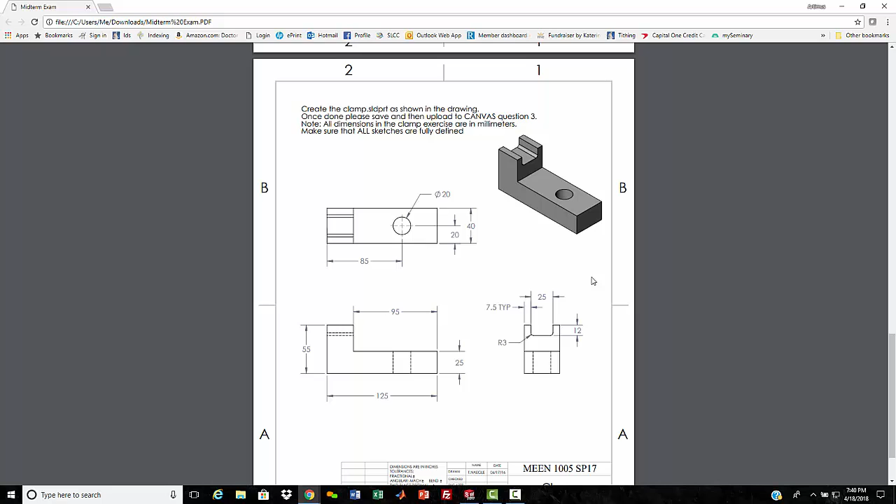What I'm going to do for you is model Exam 1 for the spring semester 2018. This exam had 3 parts to model. We begin with part number 1, a bottle; part number 2, a fastener; and part number 3, a clamp. So I will do each one the way that I would model them.

If you didn't do it the way I did it, that's fine. I know there are more ways than one to create these models in SolidWorks. With my 15 years of experience with SolidWorks, I've found this to be the easiest way to do things.

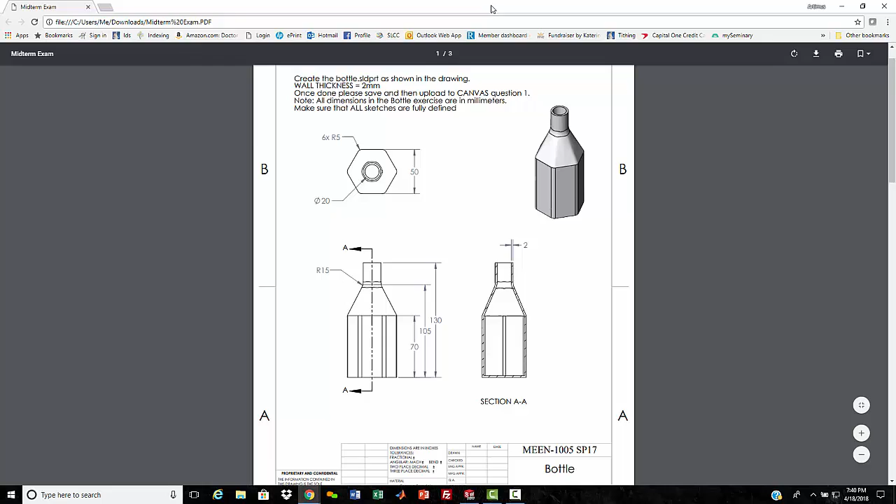So anyway, we got a bottle here. The sketch will be off the screen so it's not interfering with SolidWorks as I'm modeling, just so you can see it. We have a 6-sided bottle that is 50 millimeters across the flats, has a 20 millimeter OD on the neck, a 2 millimeter thickness of glass, and various heights with a radius here and a 5 mil radius on each of the corners past the hex.

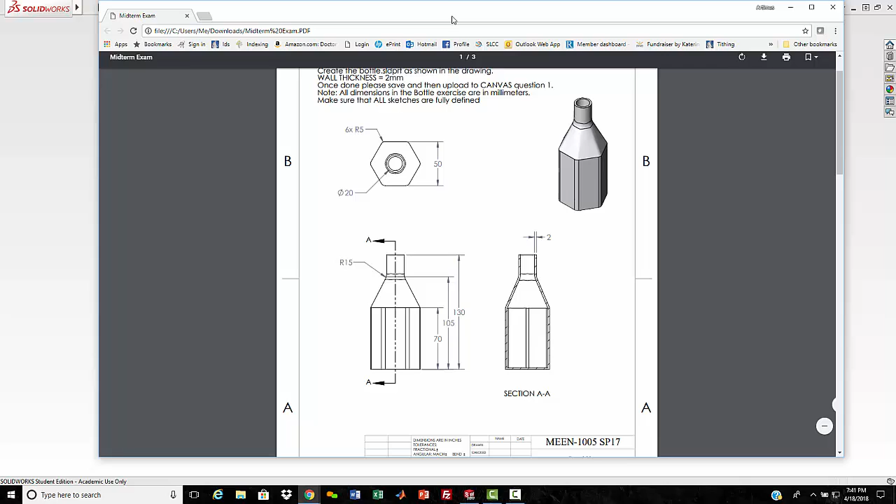So how would I do this? This is how I would do this. I would start by making a part, and I am using the student version of SolidWorks 2017-2018 because that's what I have on my laptop at home.

So first thing I'm going to do is build all my reference planes. I'm going to put the top as the bottom of my bottle, and then I need a plane that is - oh, we probably ought to change over to millimeters, make it a lot easier for us. But for right now, we can just specify that this one is 70 millimeters up and accept that, and then we'll come down and change everything to millimeters, grams, and seconds.

Then we don't have to convert from inch to millimeters. So we got our first one. Then our second reference plane is at 105 millimeters.

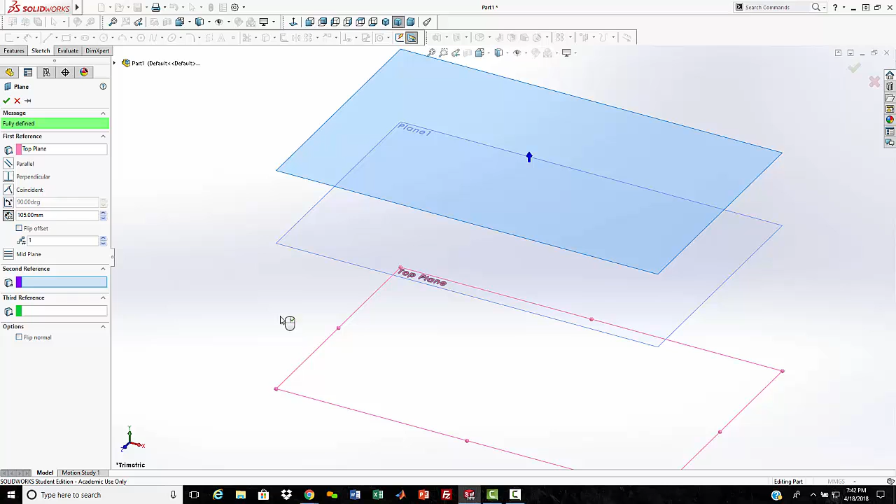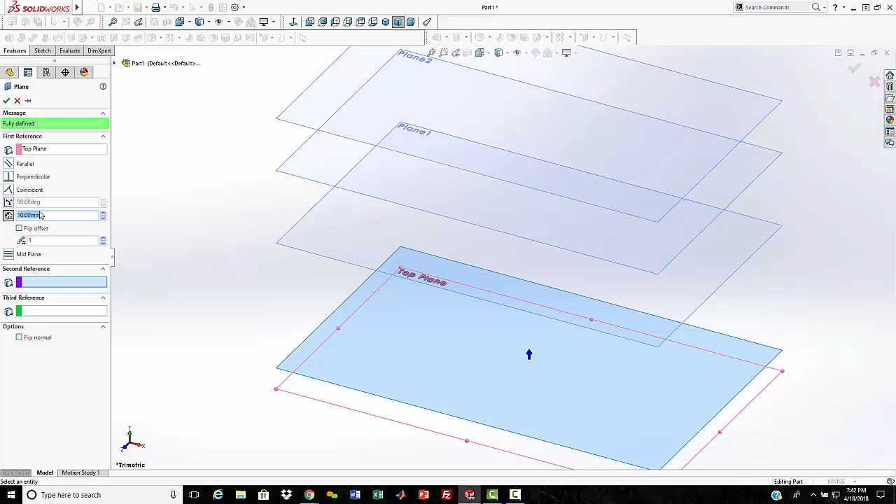And then the last one - what I'm doing here is selecting the top plane, control button, left mouse, and dragging up, in case you are unaware of how I did that. Another method would be to select the plane you want, come up here to feature, go to this, go to plane, and tell it the offset you want. I'm lazy, I find it a lot easier to just grab the left mouse and drag.

And then you can specify if they're parallel planes, if you're doing one that's at an angle to the plane or at a certain angle - you can make a plane in any orientation in space that you want. I'm going to turn this one on just to drive me nuts, but we're going to do it anyway.

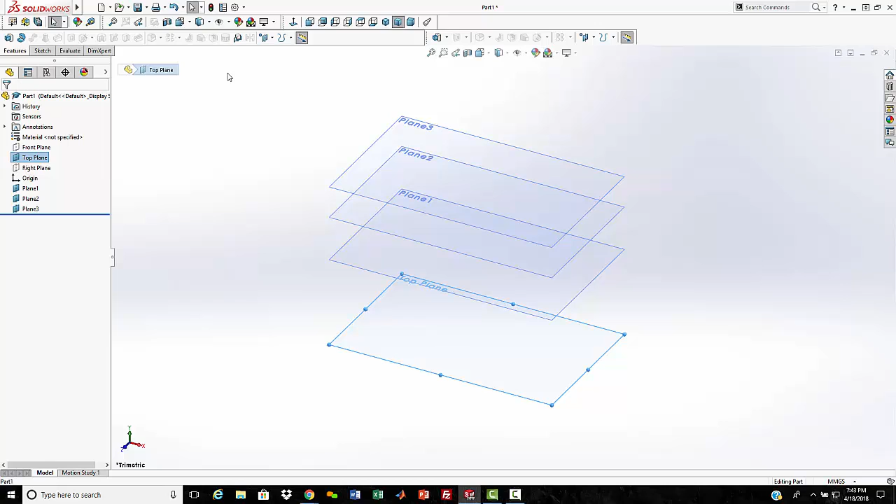So for the base up to the first plane, we have the hexagon shape. So we're going to do a sketch, and I'm going to pick my polygons here, and we are at 6 sides. If I click in the center, come down here, it doesn't matter where we put it. However, I do like to have all my sketches fully defined, and right now rotation is allowed, so we're going to grab that and make him horizontal so we can no longer rotate.

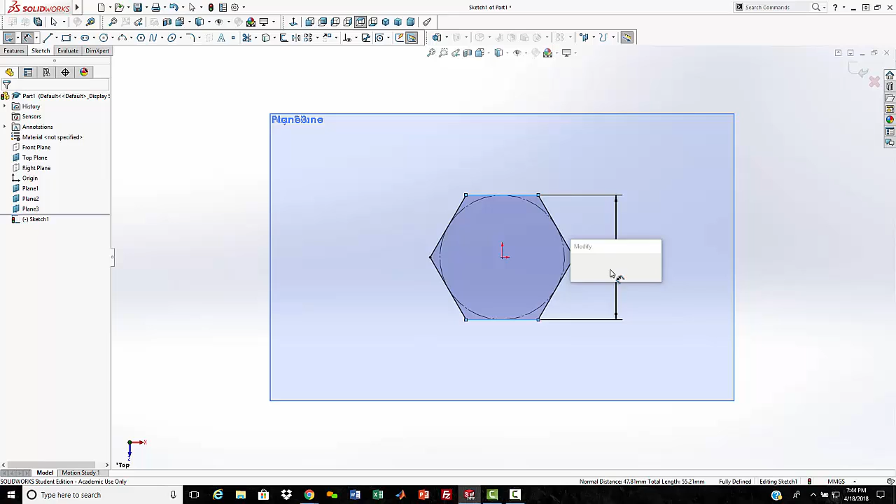Now we just got ins and outs, and then we will select a dimension, come over here, and that is 50 millimeters, and call it good.

Now this guy here is pretty much straight up, so we don't need to do a loft on him. So we're going to come over here to our features, and we're going to take him up 70 millimeters. Yeah, doing that we probably wouldn't have needed this plane here, but we got it anyway.

You know what, we're going to delete this guy, I don't want him anymore. See, I'm deleting that because if I put the sketch on the surface rather than the plane, if I change this dimension, it will change with it.

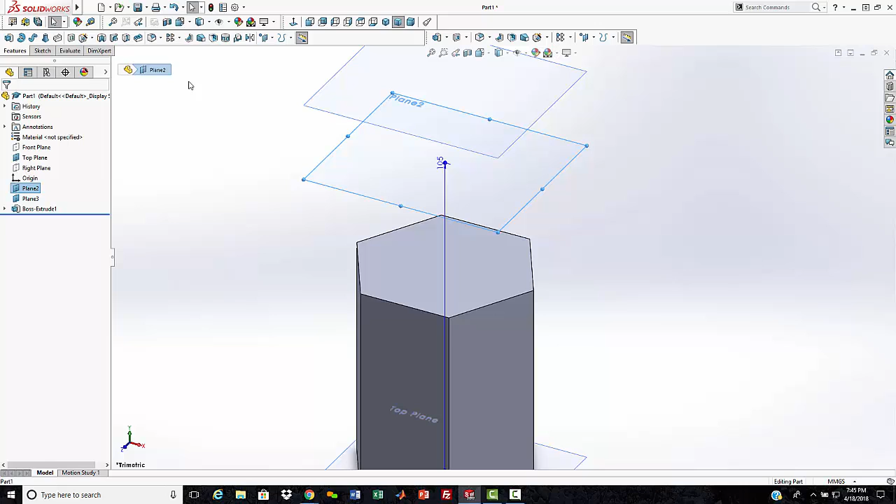Okay, so from there up we go from a six-sided surface to a round surface. So we're going to pick this guy here and do a sketch, and we want a circle right here in the middle, and our circle is 20 millimeters.

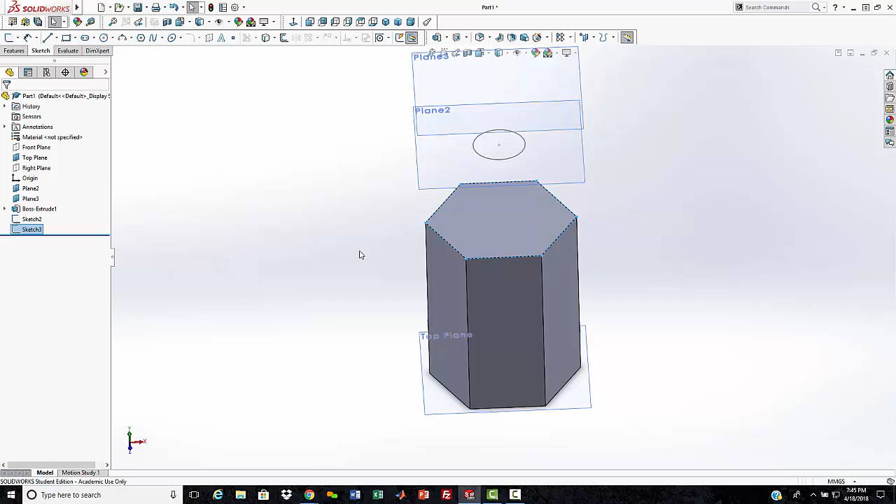We also want a sketch here, so we're just going to grab that surface, do a sketch, and I'm just going to convert the entities, which grabs all of the exterior edges of that surface and turns them into a sketch. Then we will take our front plane and do a sketch there.

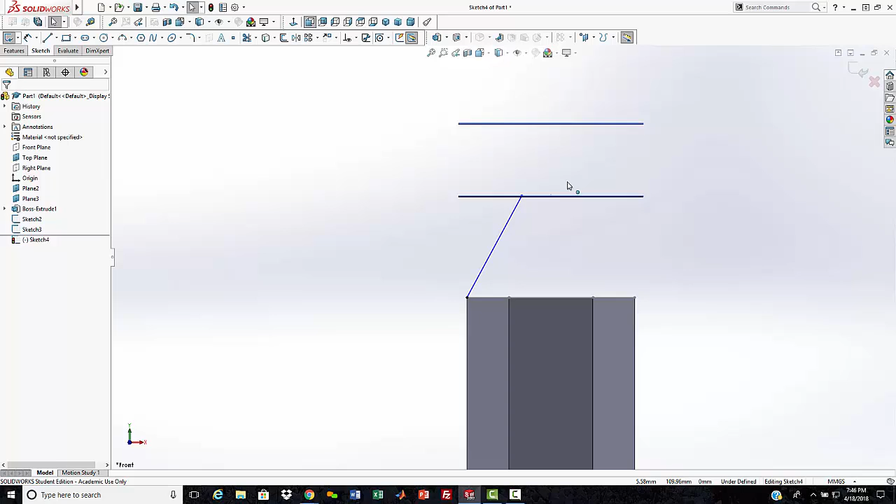This will be our guide sketch, and I'm not sure exactly where that goes, but we'll just put it there for now. He needs to be black too. Okay, so we can see that this guy's black, which means he snapped right to that corner. This guy up here didn't - he's red or blue, so he can still move.

So if we grab that guy and this guy right here and tell them to pierce, that line's black now, which means if you make changes to this, it will also change that line. That's why I like having all of my sketches fully defined.

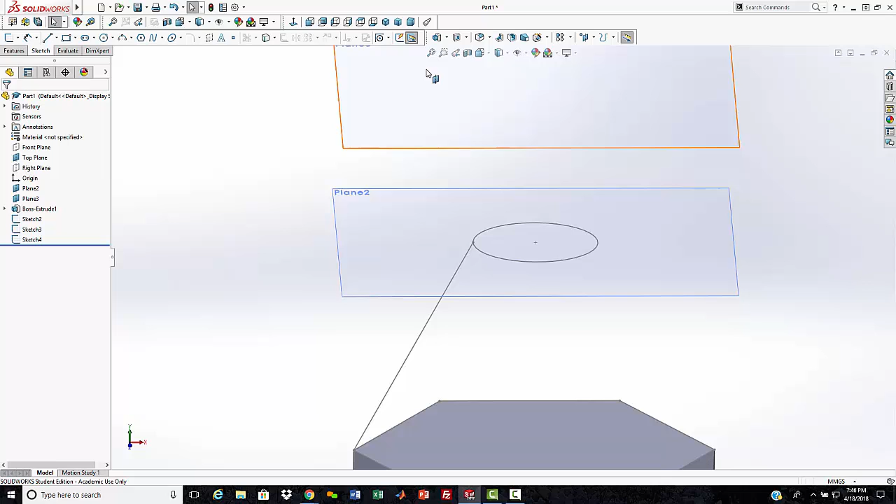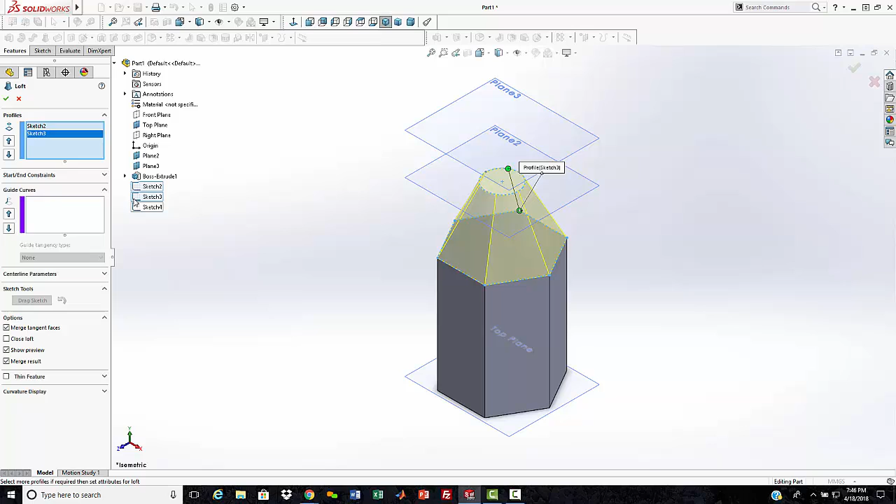So now we can come to the loft command. Loft, and our sketches - we're going from, you can either select the sketches here in your field, or you can come over here and select them too, whichever is easier for you. And then our guide will be sketch 4. It probably doesn't really need it because it's straightforward.

Oh, wait a minute, we left something out, and see here, this is what should be good - we forgot the radiuses on the corners.

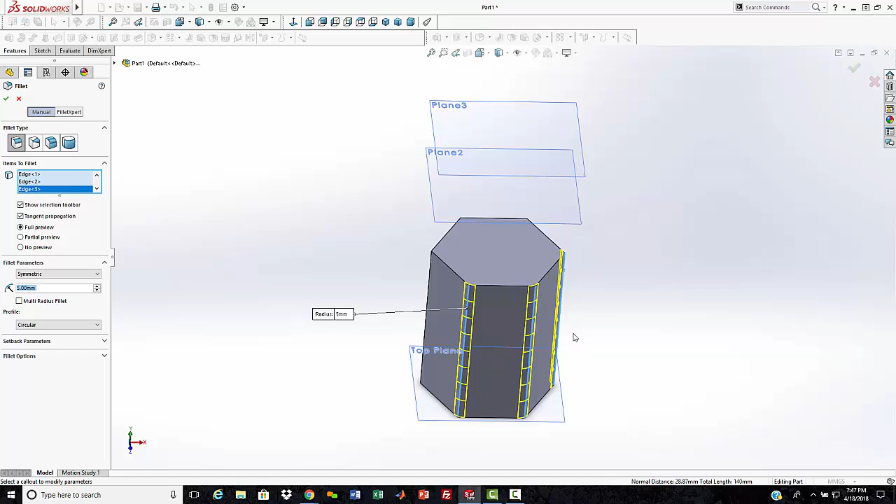Now you can do those radiuses two ways. You can do a separate feature of radiuses - we come down here and put fillets, do 5 millimeters, and select all these surfaces. Not that surface, this surface, this surface, and this surface. Okay, and that gives us our 5 millimeters.

Or if you want to minimize the amount of stuff you have over here, we can go back to our sketch and pick a radius of 5 millimeters and pick on each of the dots here. And this is going to make it scream when we're done because there's no surface for that fillet we just put in, to radius to.

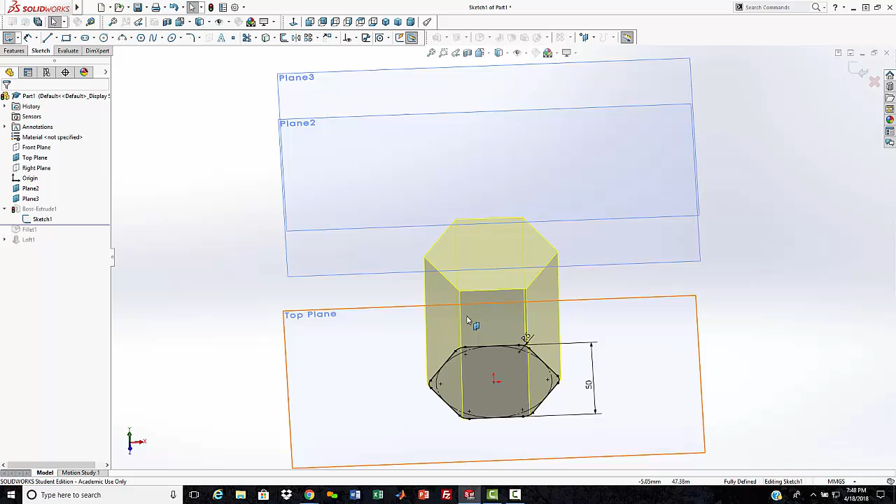We're just going to ignore that, and it's screaming because of this fillet right here. So we're going to get rid of that, close, and see, we got a problem now with our sketch here because we took away the corner that it snapped to.

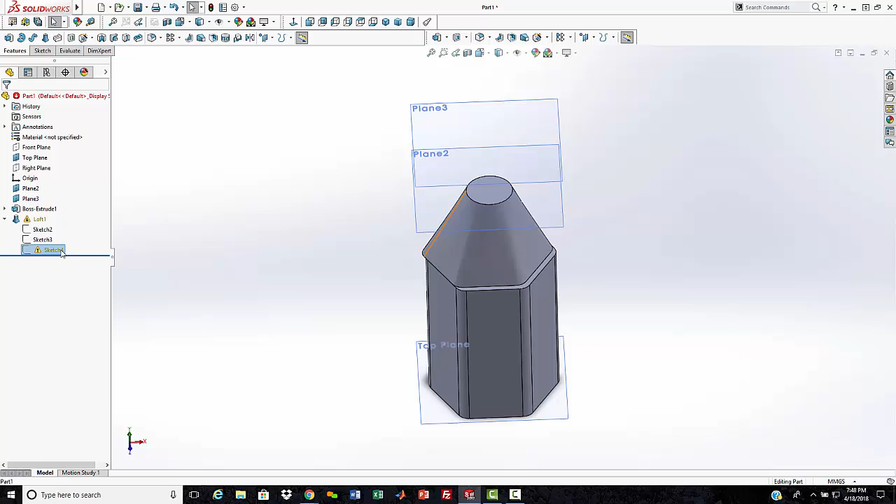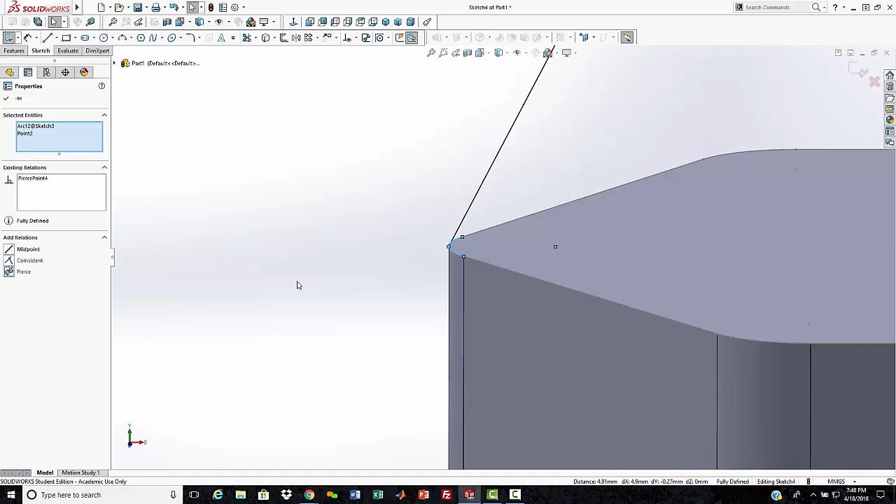So we will go on here, right mouse click, go up to edit sketch, and we will grab this guy right here and click on that mate and delete it, and then take and do like we did above, grab that surface, that point, and tell them to pierce, and then everybody is now happy. Happy, happy, happy.

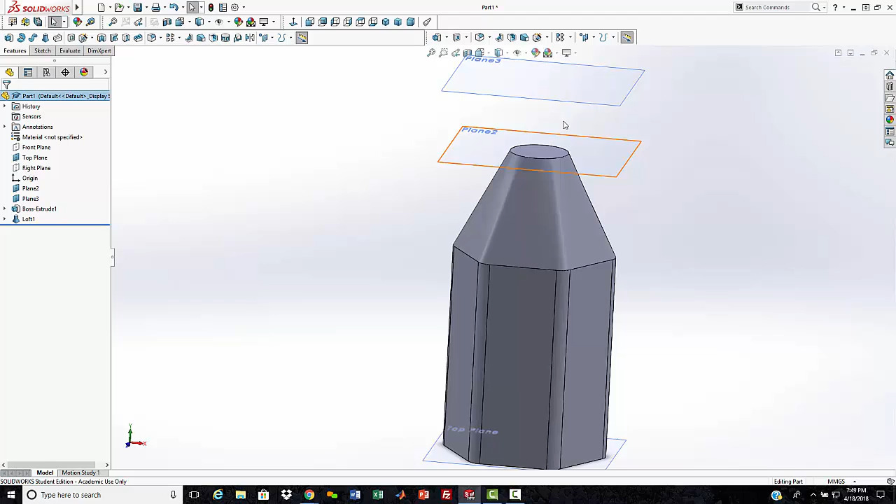Okay, so now we've got this guy here. We want to add the neck into it next. We can do that a few ways - let's do it this way. Let's grab this sketch plane, and we want to do an extrusion, and we're going to do a circle.

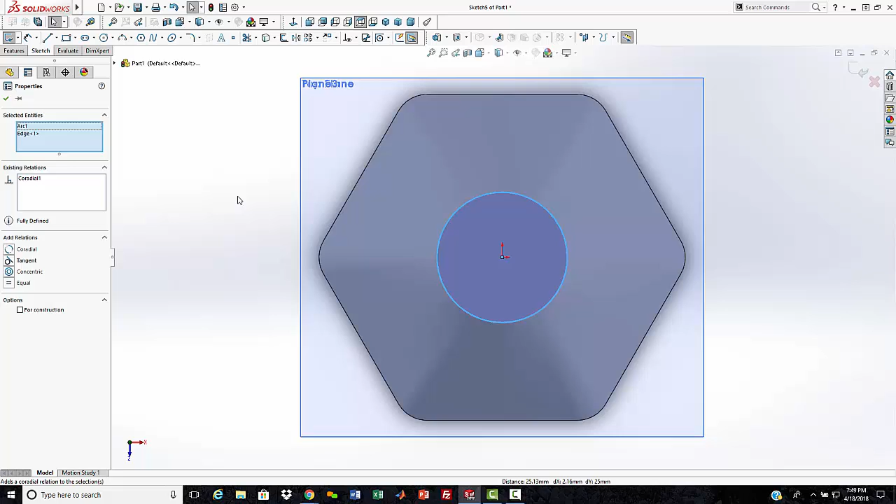Now there's a couple of ways to do this. If you want to tie that to your existing circle, you can grab that guy and this guy right here and make them co-radial. That way if you change the lower one, the upper one will change with it. Or you can dimension it and make the dimensions equal through some...

Oh, what is that? Equations - you can add an equation to where those will be the same. We'll just make those two collinear, or co-radial, and if you clicked on it, you'll look down here and see that it is a diameter of 20 millimeters, so it is the proper size.

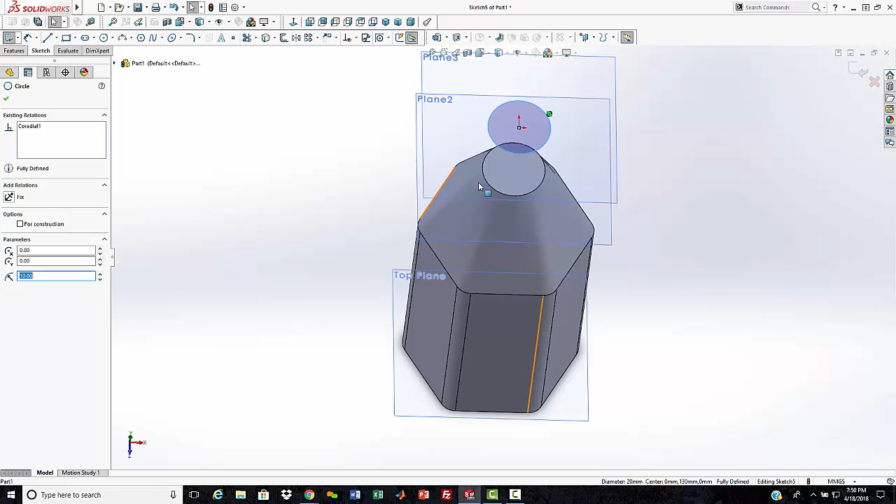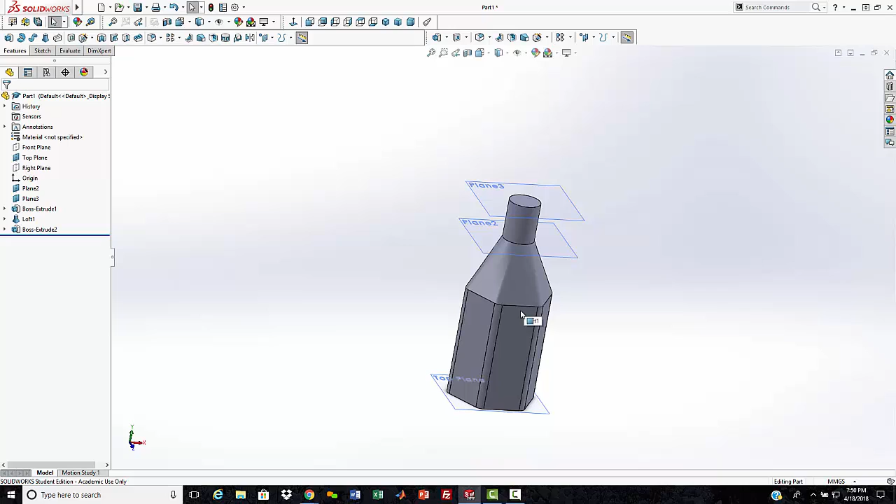And we're going to exit the sketch, and we're going to extrude up to a surface, up to this one right here, which is that surface down there, and call that good. And now if we make any changes, everything will change and everybody will be happy.

Okay, so now we need to add a 15 millimeter radius right here, so we'll click on that surface, go to fillet, do 15 millimeters, and call it good. And so there's the outside of our bottle.

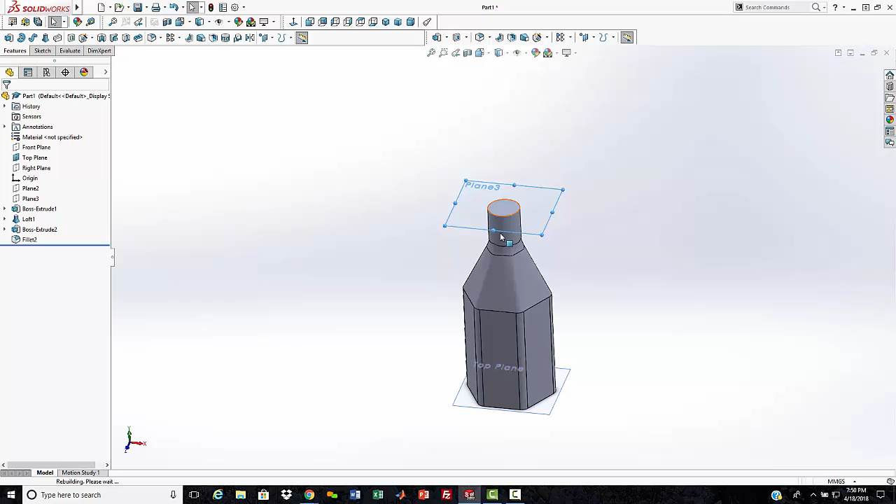I don't like these things - that's hard to see apart when they're hidden behind a whole bunch of planes, so I always hide them.

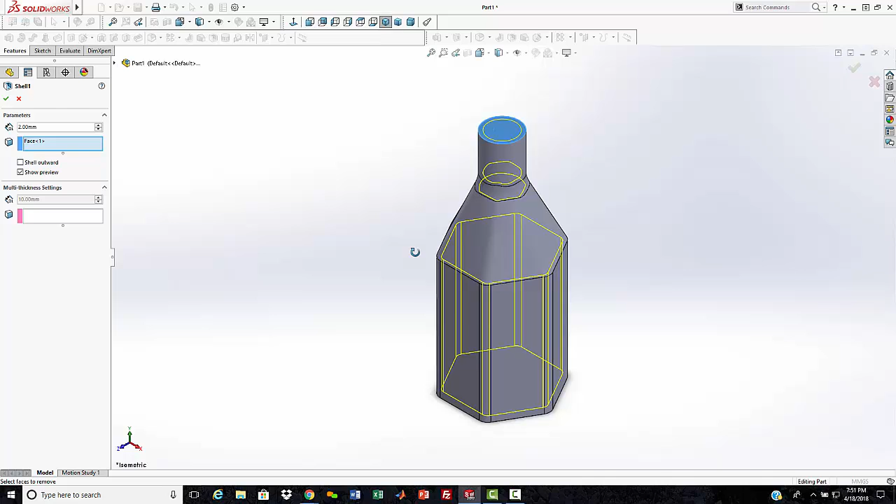Now the last thing we want to do is select on this surface here, go to shell, and we want to have a 2 millimeter wall. If you want to show the preview, you select it and you'll see that shells out the whole bottle. And if you want to make sure it goes all the way down, you can see right there that you've selected the bottom of it.

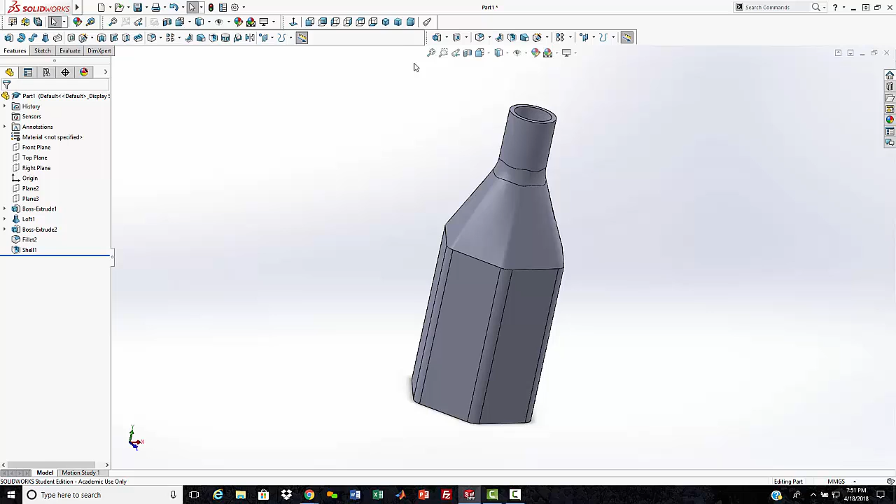So that is how I did the bottle. If you have any questions on these, by all means, let me know.

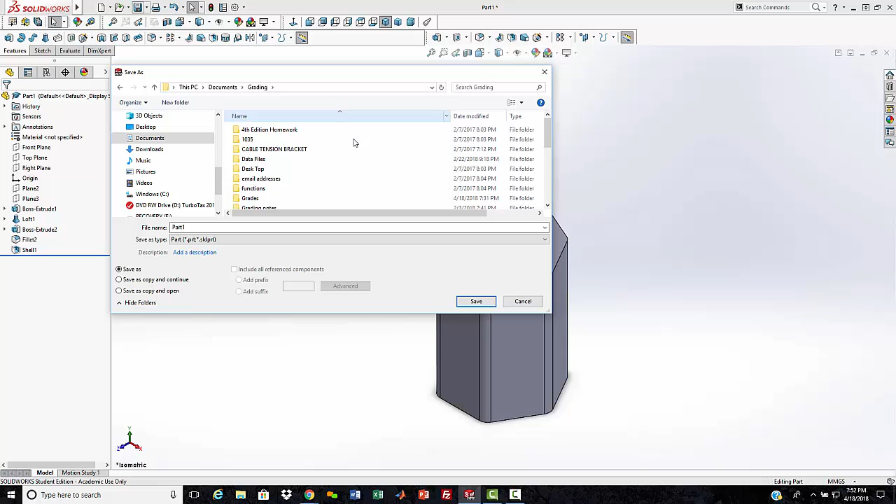We'll do a save here, not create new. I'm going to save that to my SolidWorks file. Somewhere I have a SolidWorks file... I don't have one. Oh well, let's create one. Oh, don't do that. Now where'd my SolidWorks file go? Refresh, go back into... there you are. Hey, I did have a SolidWorks file. There we go, cool, I thought I had one.

And this would be a bottle. I'm just going to put spring 2018 on there so I know when it was created. So there's the bottle. Okay, so next up in the exam was a fastener.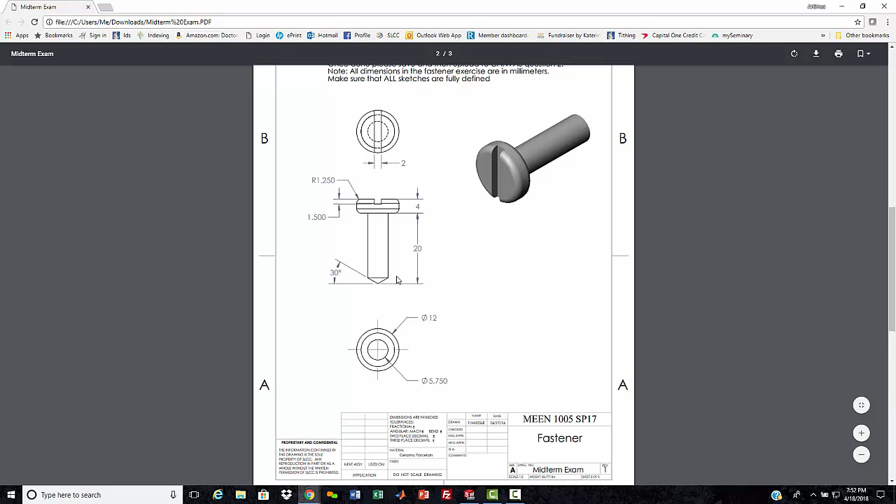This is a real simple design. We should be able to do that in two features. We'll do a revolve and then we'll do a cut for the slot.

So we're going to do a part, this time on the front. We're going to tell it what we're going to do first. Okay, so we're doing a revolve. We need to do our center line, so we're going to pull the center line off of here, and hitting the S key brings up this menu.

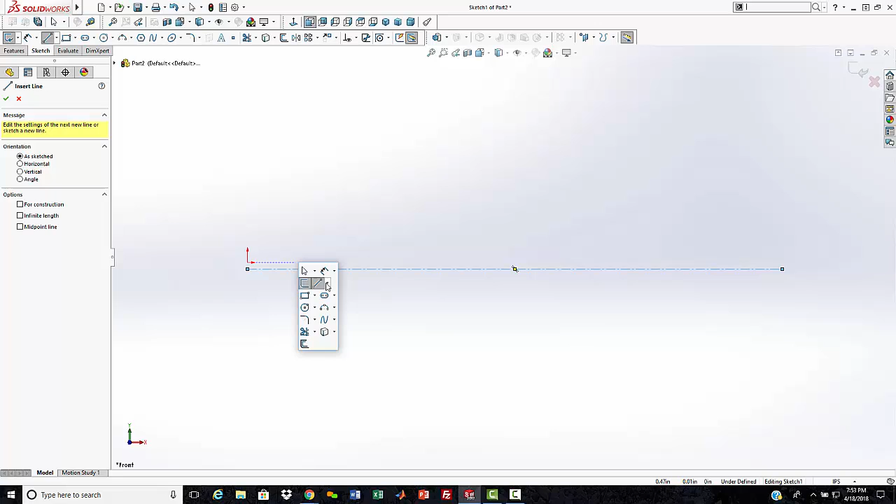We're going to draw solid lines now, and I'm just going to sketch out the fastener. You got to do half of it. Okay, and then we'll come in and dimension.

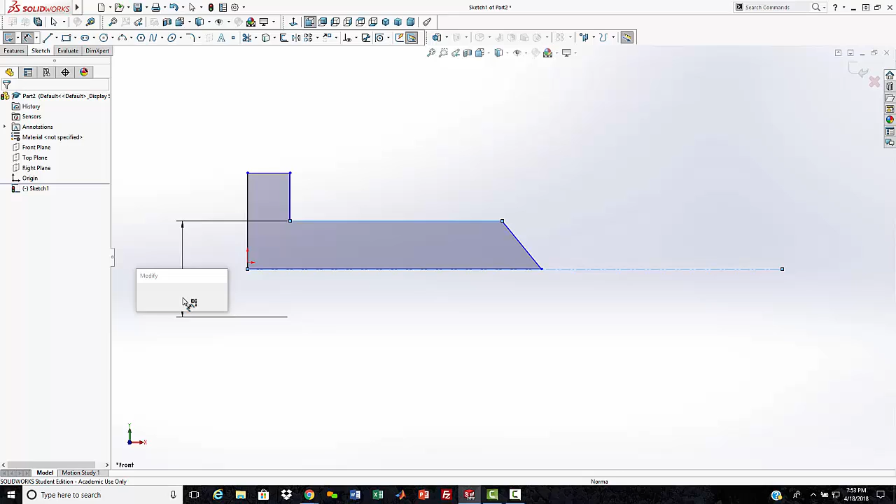If we click on the center line, we can then dimension all of our radii. This had a diameter of 5.75 millimeters. This had a dimension of 12 millimeters. This had a dimension of 4 millimeters. Our overall length was 20 millimeters.

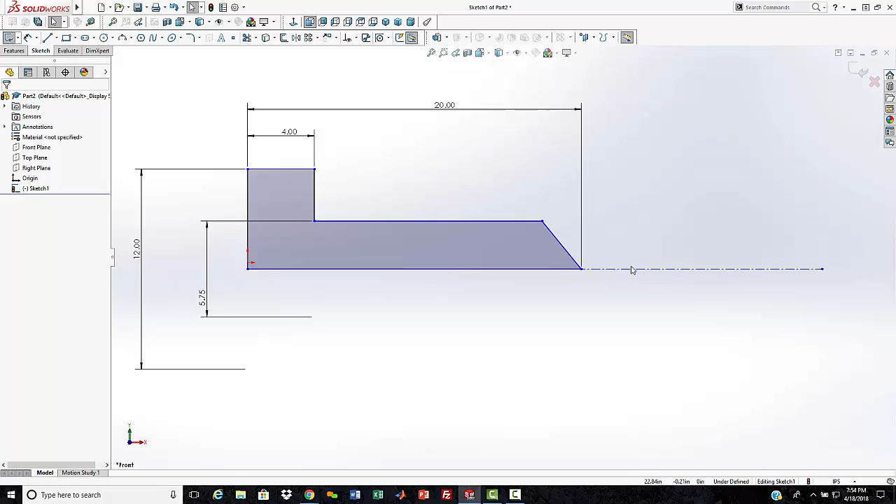Why aren't my... oh, because something here's not... oh, that didn't attach to the origin. There we go. We'll take those two and make them coincident, so all my lines should be turning black.

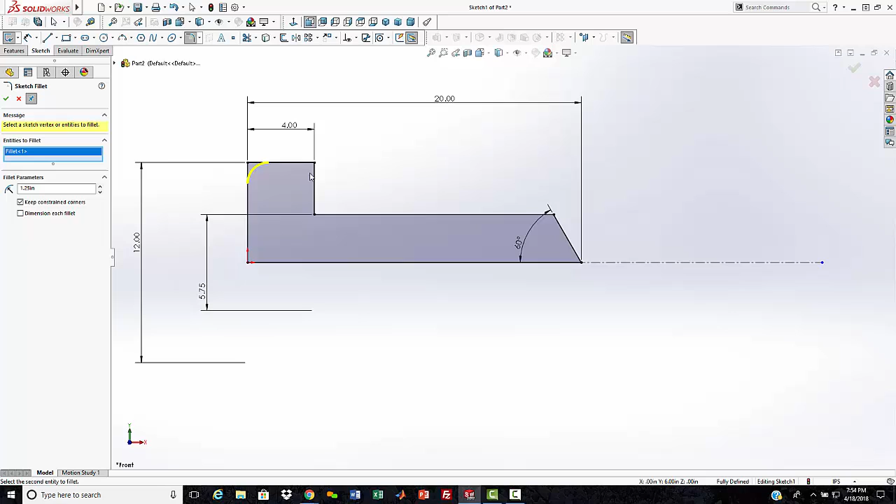And then we got to do a 30-degree angle on the tip. So from there to there, if we have 30 left over, that means this is 60. Okay, and we have radiuses on the head, so let's do those in here of 1.250 on a radius here and a radius there, and click OK.

We're done. Oh wait a minute, you didn't finish the radius, so let's go back to edit, and I should still have the right one. Hit that, and then say yes, and then close that.

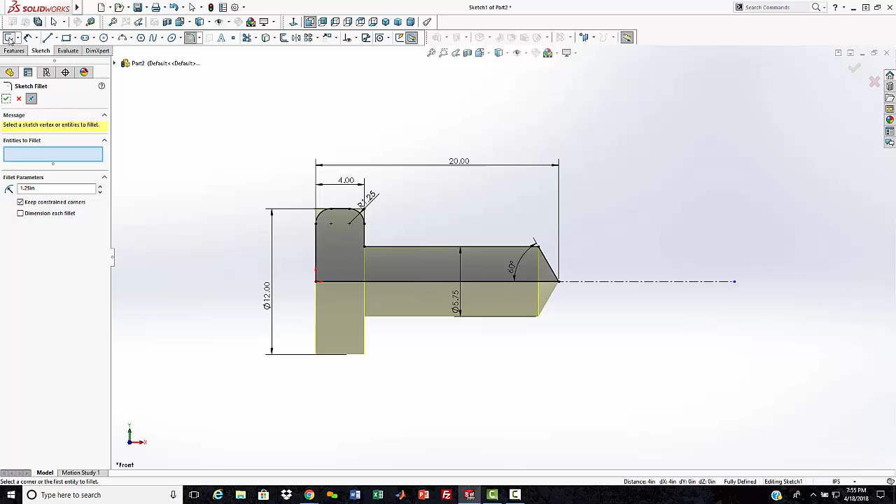Okay, so there's the body. And if we click on this, this should be 5.75. Click on this one, should be 12.

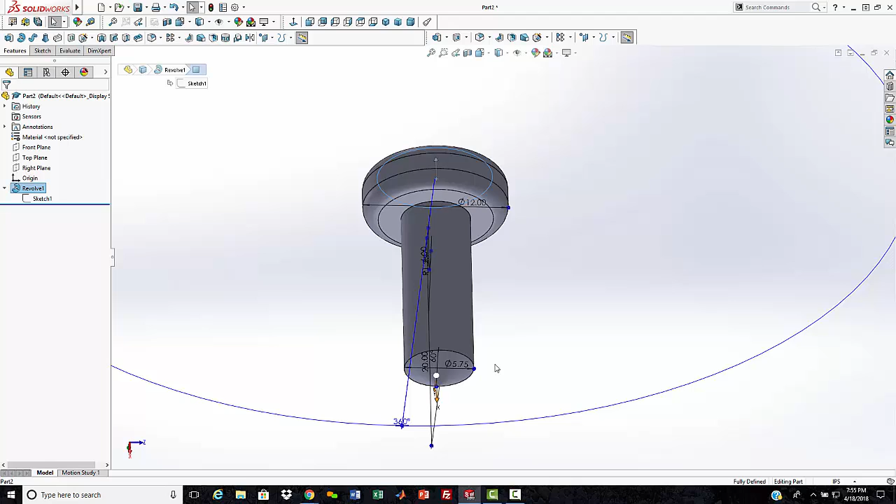If we click that surface and control select that point, okay, it's not going to give it to us. So we'll come up here and go get our toolbox, put it up here and measure, and we'll see that the normal distance is 20 inches.

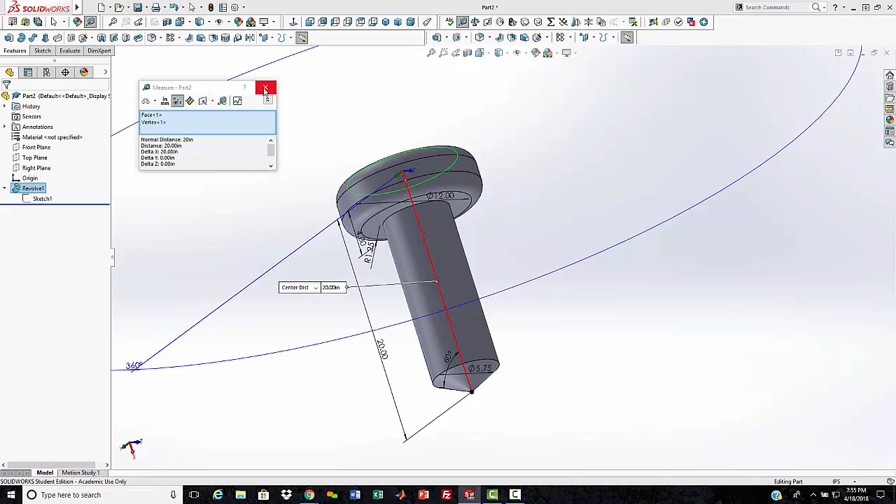Are you really going to post that on Facebook that you're so stupid you did it in the wrong units?

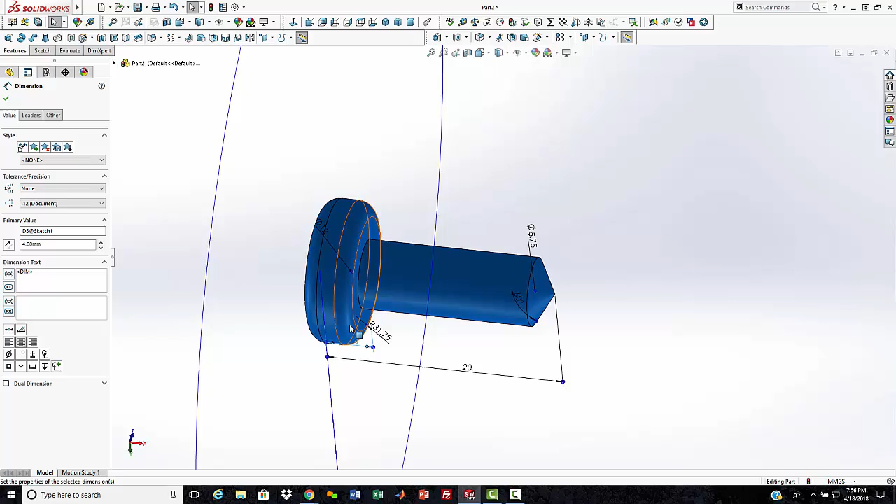Yes, I am. So this here was supposed to be 5.75 millimeters. This one was supposed to be 12. This one was supposed to be 20 - I didn't want a minus 20, I want 20. And this one was supposed to be 4. And the radiuses were supposed to be 1.25.

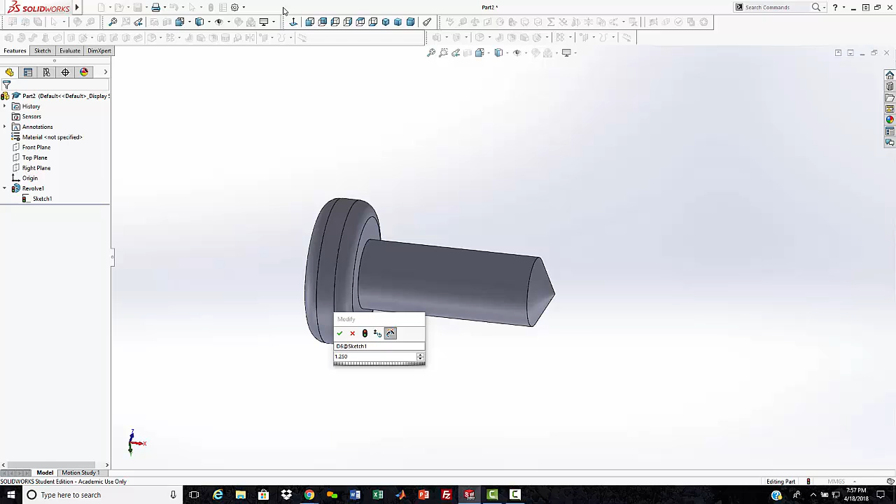And now if we redo everything... where'd my redo button go? Somebody stole my redo button. How can I not have a redo button? Oh, it's right there, it's not letting me do it. Oh, because it thinks I'm still changing a dimension. There we go. And now everything's a lot smaller, but it's still the same.

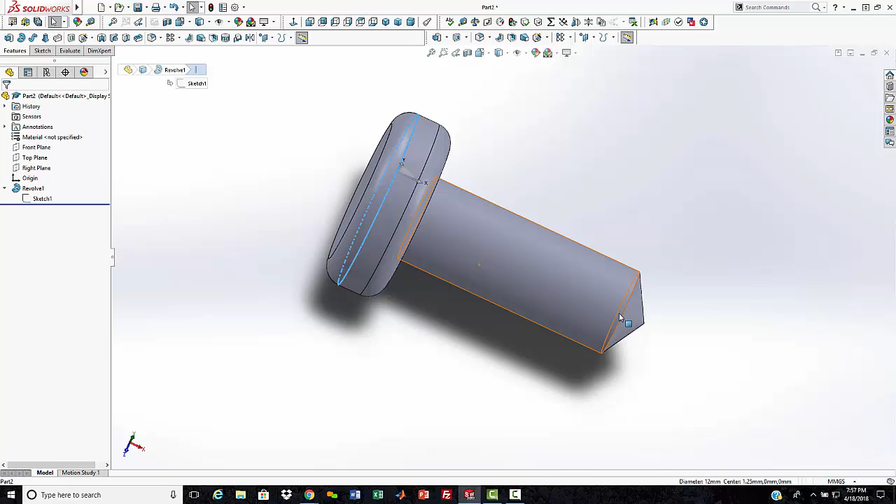That's 12 millimeters, and again, let's pull up our measure tape and measure from there to that tip, and we're at 20 millimeters, and from there to there is 4 millimeters, and they're parallel.

Okay, so the last thing we need to do to this guy is put the slot in. So we'll grab the front plane, come to our features, and do a cut, not a revolve cut, we just want to do an extruded cut.

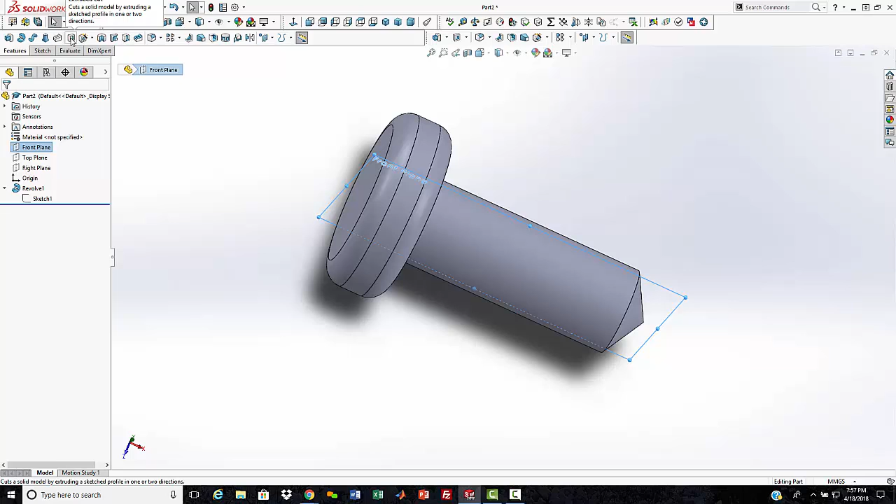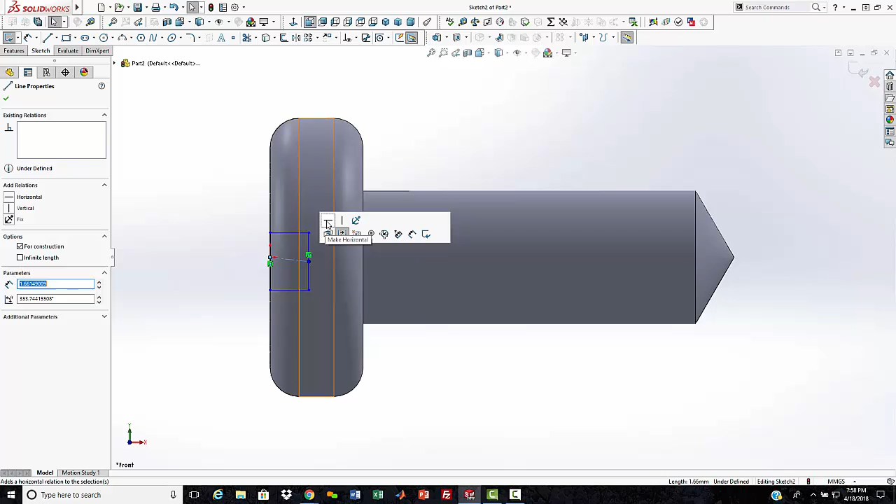And we'll put a square there, and then you can dimension that so that it is centered in there, but I like to take a construction line from the origin to the center of that one and then make this guy horizontal, and now I know it's symmetric, so no matter where I move it, it'll always be symmetric.

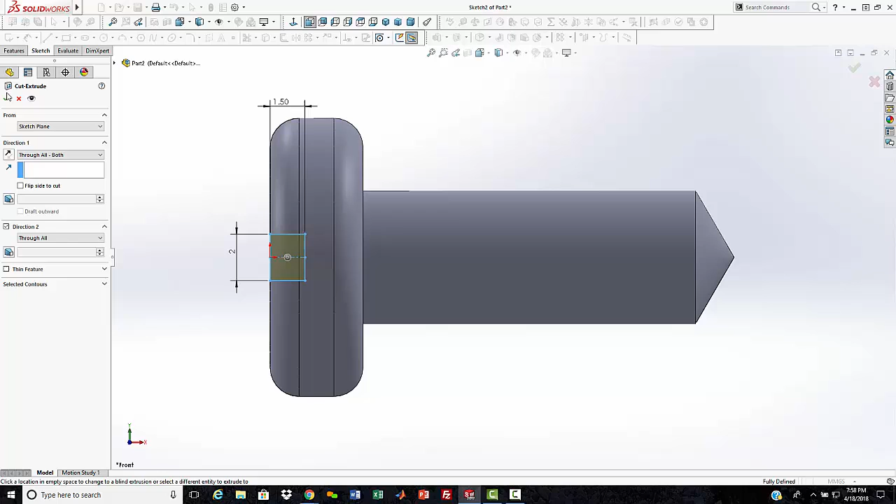So it is dimensioned 1.5 millimeters, and it is 2 millimeters wide, and we're done. We're going to extrude cut both through all, and there's our fastener.

Pretty simple little part, especially if you remember to put it in the right units. We'll try and do that one on the last one, do it right.

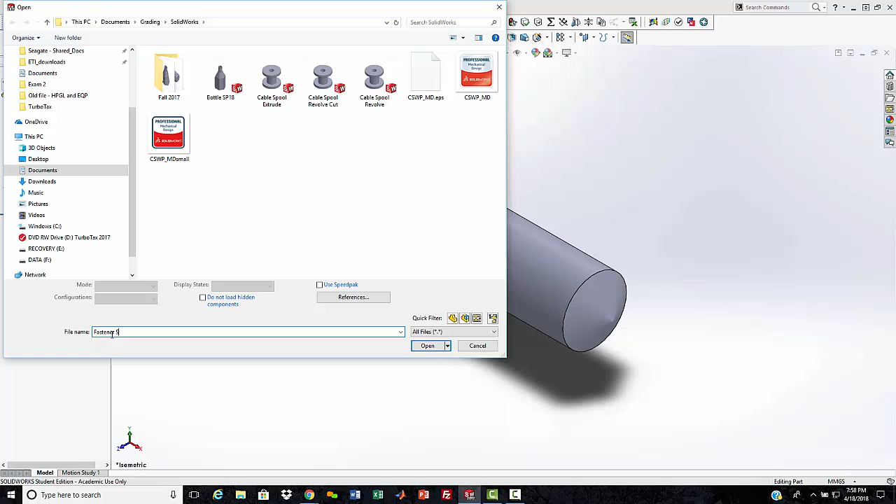So let's save this one. We will do fastener spring 18.

What do you mean it's not a valid name? Oh, you did open because you're stupid. We want to save, you dummy.

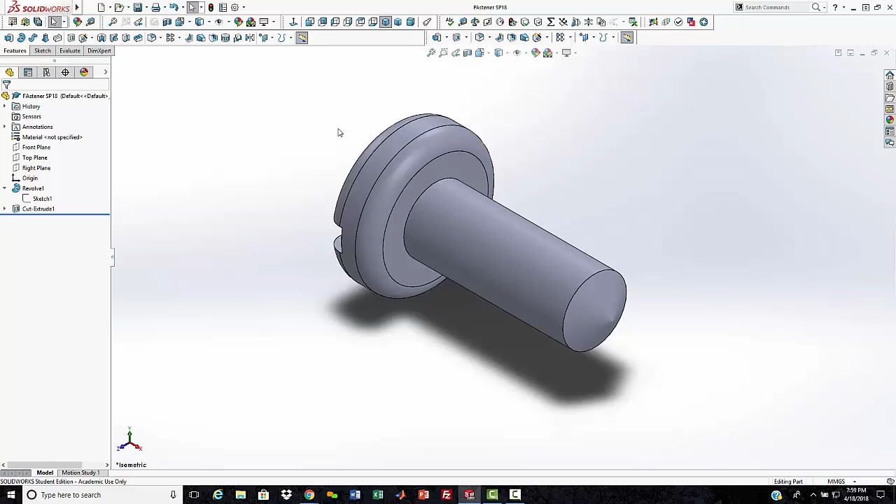Okay, so there's our fastener. So the last one we have to do here is this clamp. This is a straightforward part. We can do this in 3 moves. So let's do it.

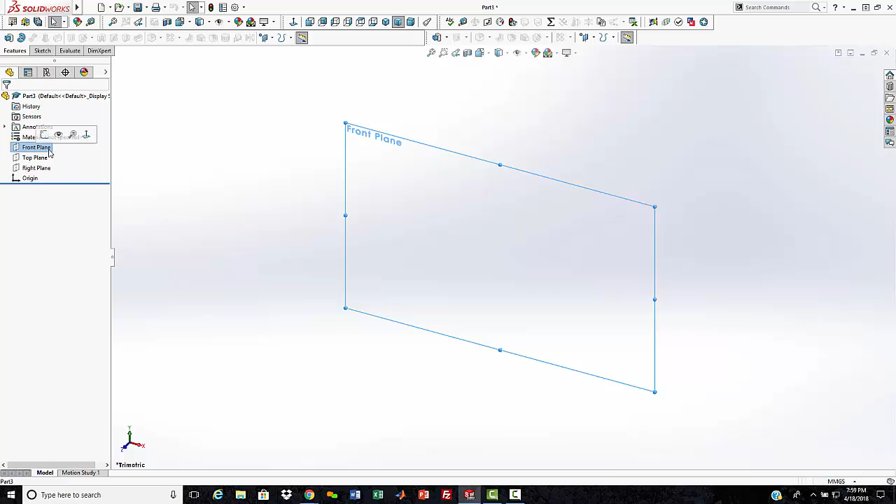So we get us a new part, and the first thing we're going to do this time is change over to millimeters. Okay, so we're going to start with the front, and we're going to extrude, and we're going to do the side of the block first. So we're going to put this corner down here, and we're going to come up, over, down, over, down, down.

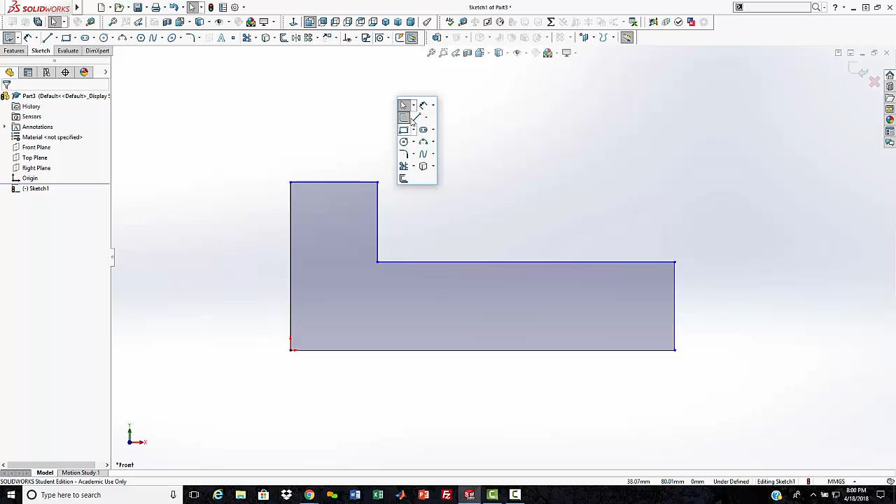Okay, you'll notice that this line's not parallel, so we'll just grab all those lines. We want to make them all horizontal. And now we will dimension.

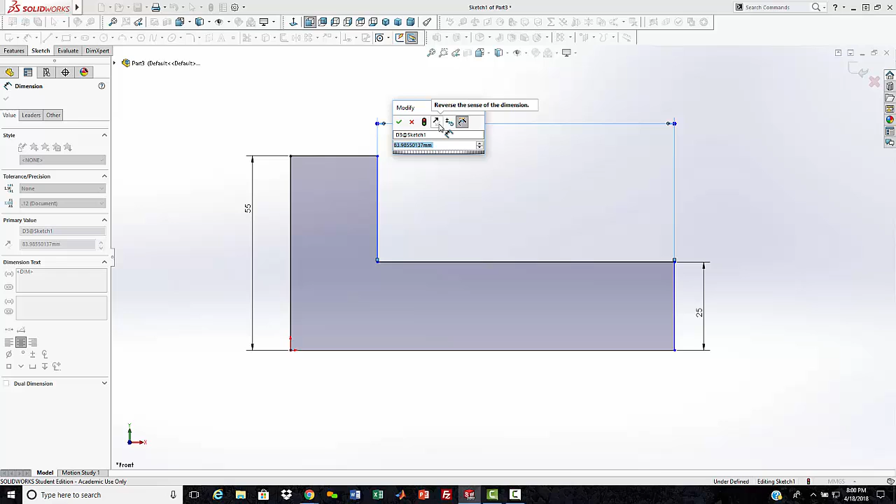So this here is supposed to be 25. This is supposed to be 55. This is supposed to be what's left over, so we'll delete that. The dimension given in the drawing is this one, which is 95 millimeters. And this one here is 125 millimeters.

Okay, and I like to keep my parts centered about the origin, going back and forth this way. So we will do our extrude, but we're going to do a mid-plane blind, and that'll extrude it both directions. Can you see my hands making the movement there? Yeah, I'm sure you can. It'll extrude the part both directions equally about the sketch plane.

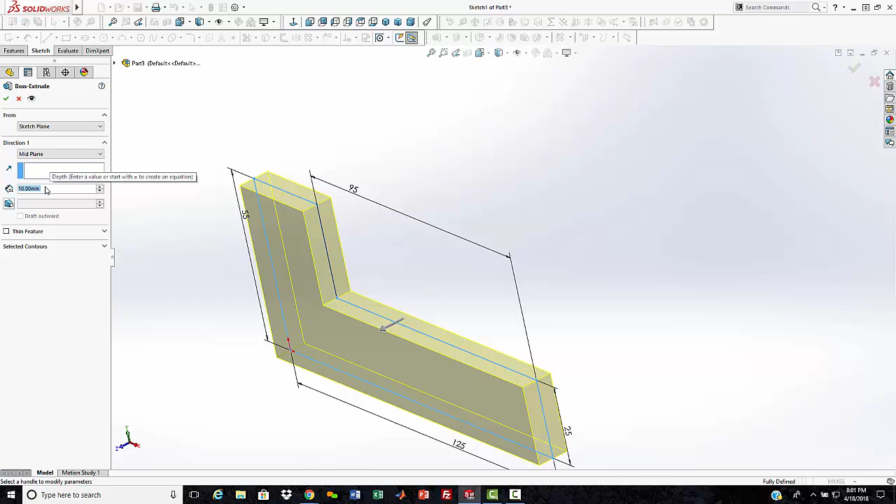And we are 40 millimeters, so if we go 40, that means each side will be 20. I like to do that for when I get into mating. If I want to mate something to the center of that block, I can mate it right to that plane. And I don't have to create planes, I don't have to create geometries, I don't have to create things, or do an offset. I like symmetry.

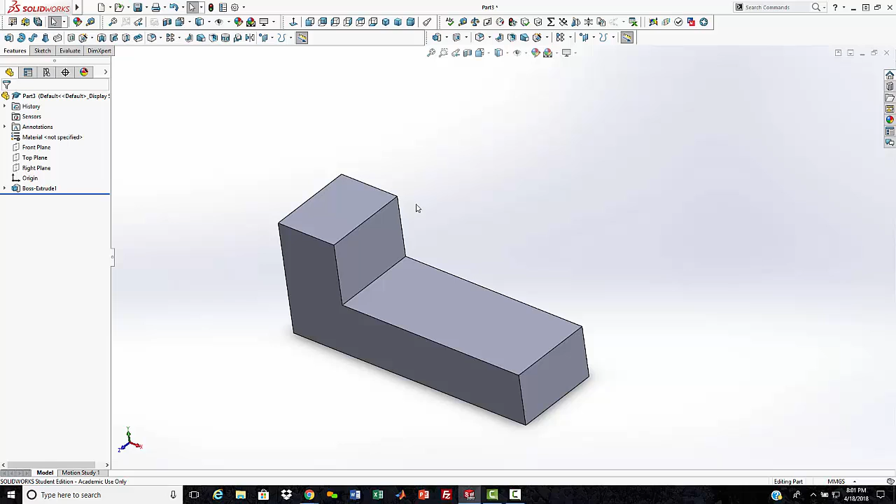Okay, so now we got two more things to do. We got to put a hole in it. So let's put a hole in it. We'll grab that surface, do a cut, do a circle.

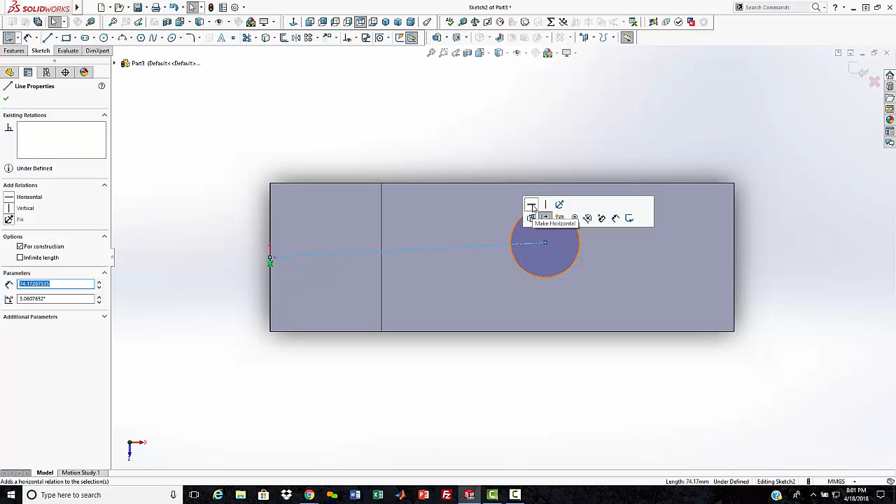That circle's too big. Yes, I know, we'll bring it down a little bit. Okay, so it's on center. So we'll grab that and put that there, and grab our tool here.

The hole is 20 millimeters, and it is, oh, look at that, we can just dimension that line because that's what's given, and then we'll do a cut through all. And there's our hole.

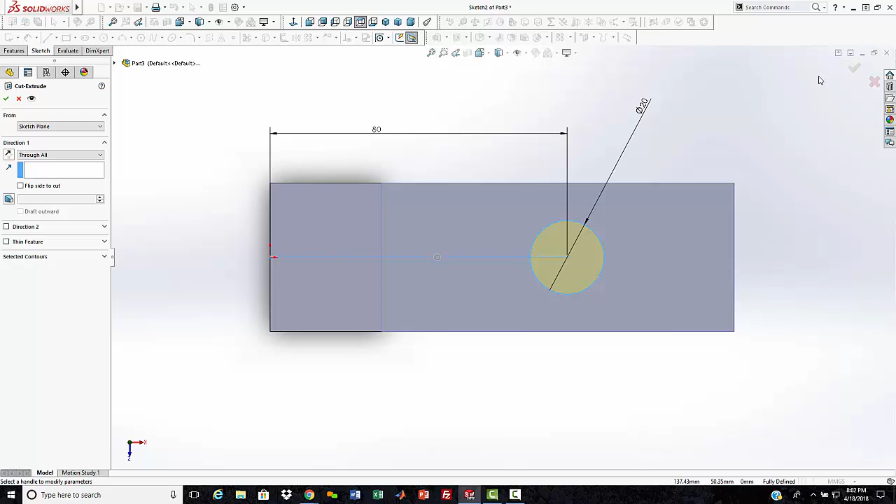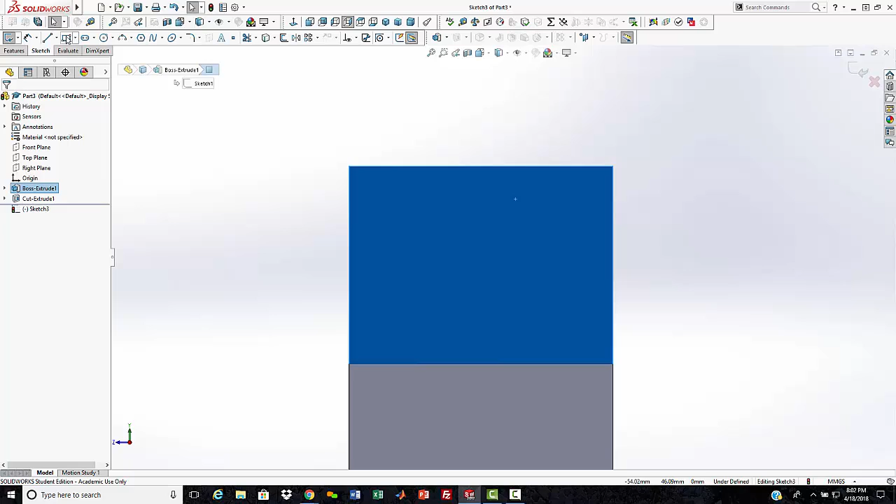And then the last thing we got to do is a little slot on top. So we'll select this surface here, do an extruded cut, bring it orthogonal, parallel to the screen so we can see what we're doing. And it looks like it's just a simple box with two radii. So we'll grab that corner, go there, there. We'll put our radii in, which are 3 millimeters.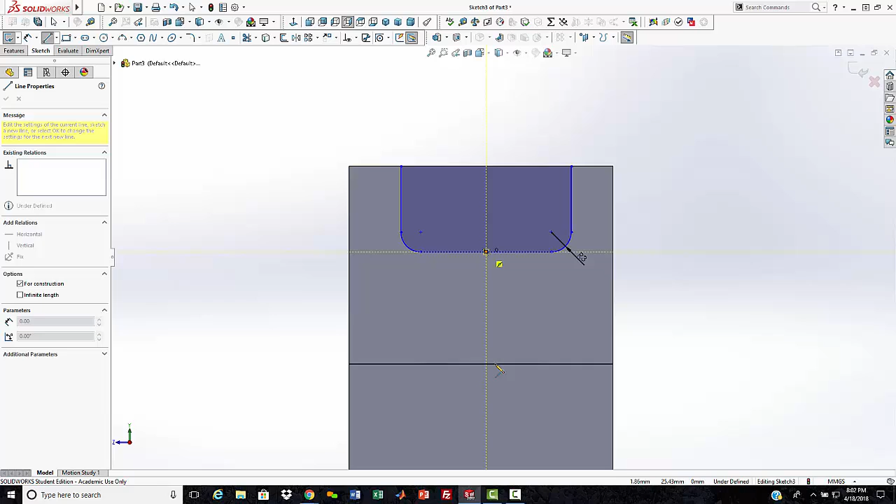And then again, to keep it centered, I'll grab the center of that line, bring it down to the center point of that one, and then make it vertical. And now you'll see it moves the same, and that'll give us our 7.5 typical there.

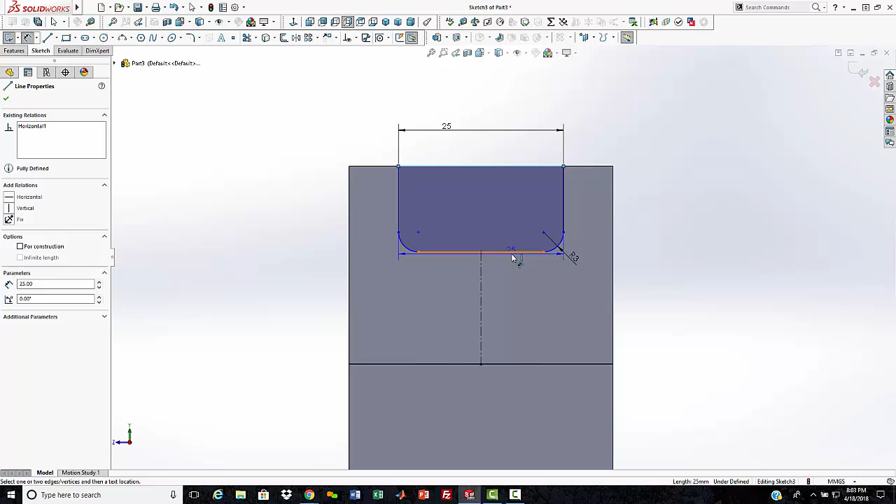But if we do a dimension here of 25 and a dimension here of 12, tell it to cut through all, and that's it.

And we'll save this block. This is a clamp from spring 2018.